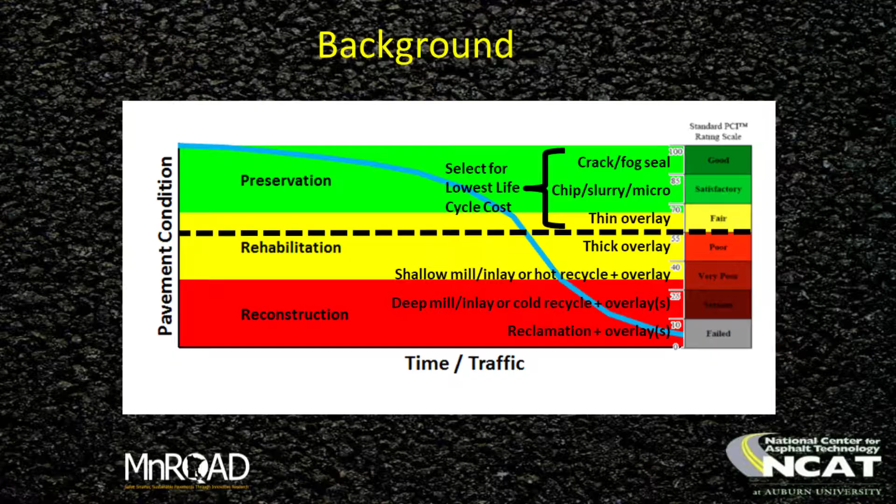I've got one background slide I really like, starting out kind of theoretically talking about the life cycle curve for pavements and what is preservation, rehabilitation, and reconstruction. And when you overlay onto this an ASTM style PCI grading scale, and then you look at how some of the states, some of the agencies, counties and cities, have historically done kind of the worst first approach to the work that's needed on a roadway based on the severity level of the roadway. Of course, in pavement preservation, what we want to do is keep things up on the high end of the scale.

I really like this graphic, and I'm going to actually update this. I was in New Mexico doing some training a couple of weeks ago with Jeff Mann and the guys from the New Mexico DOT, and they've actually put dollar values on their y-axis on a graph like this. So on their scale for life cycle pavement performance, they go from 0 at the top of the y-axis where you first build a brand new pavement, and the bottom of the y-axis is just under $1 million a lane mile.

So they've actually gone through their maintenance and construction databases, connected that to pavement management, and they're able to put dollar values on the different options, and it helps them to focus their resources on staying up in the high part of that curve, because what we really want to do is select those options that give us the best possible life cycle cost and investment.

The challenge that most state agencies have, maybe not the majority of agencies in this room, is they get feedback from their pavement management system, and pavement management tells them this treatment can last anywhere between 3 years and 10 years. How do they know what number to use when they're doing a cost analysis to try to decide what treatment to use on a particular roadway?

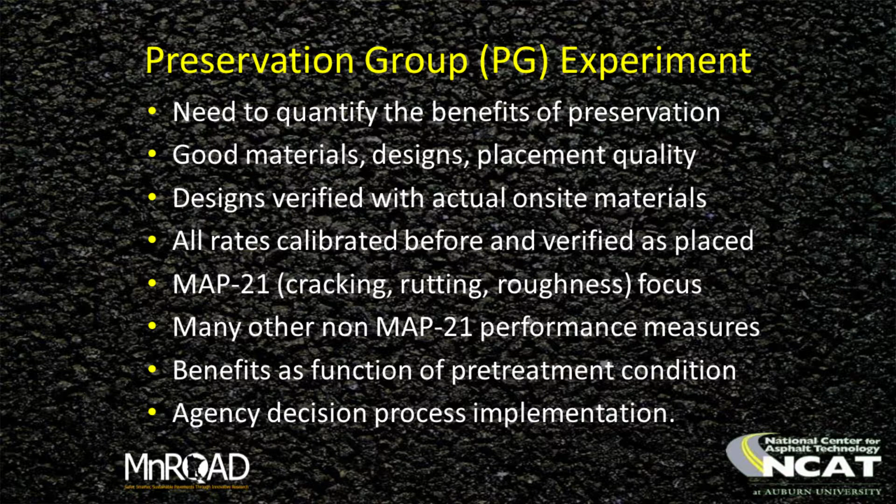So what we're doing is we're quantifying the benefits and relating them all back to different levels of pretreatment condition to attach a number to when a good road lasts a long time with a treatment on it compared to a bad road with the same treatment on it. How does that affect your expectation of life cycle performance? And then of course the end game for all this is implementation with the agency, support for deployment. And that now is our big focus in the current research cycle in the NCAT MnROAD partnership, is to support deployment of the things that we're learning.

So if you look at the preservation treatments and the treatment combinations that we've included in the study, we've got emulsion focused treatments and we got plant mix focused treatments. On the emulsion side, fog seals with and without rejuvenators, chip seals with and without rejuvenators as scrub seals, and with and without fibers. Microsurface, plain microsurface, highly polymer modified, with and without fibers, and then single and double layer microsurface treatments. And then also microsurface as a quote cape seal on chips and on scrubs.

So I put air quotes around cape seals because, as was pointed out to me, internationally the true cape seal is a slurry seal on top of a standard chip seal, and we don't have any slurry seals. All of our slurry seals are polymer modified, so they're all microsurfaces in our standalone micros and in our cape seal treatments that we have.

On the plant mix side, the focus very much is small, dense graded plant mix asphalt. So when I say small, that's a screening and sand sized mix, and all the screening and sand mixes that we do research with relate back to a very successful mix that was supposed to have been a low volume road experiment on a 2003 test track. It was designed for 500,000 ESALs, and it's now been down for over 50 million ESALs and still looks great to this day.

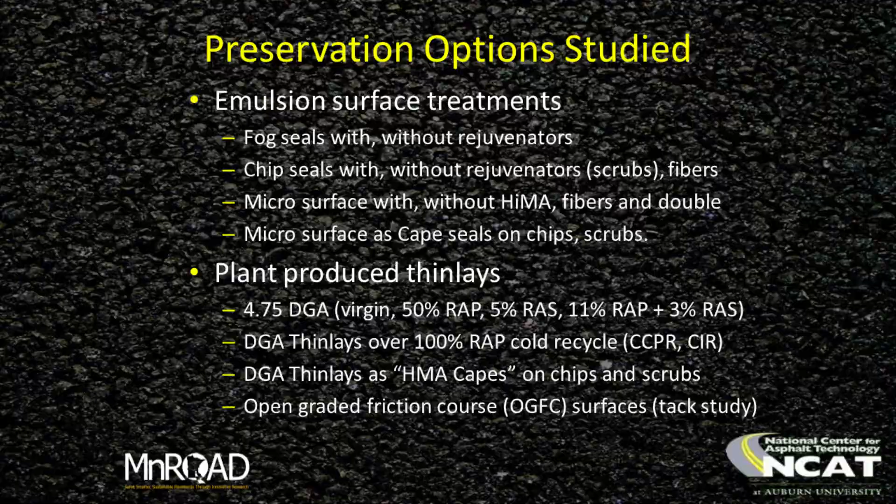We've got the same mix on 100% RAP cold recycle mix, and that's central plant and in place with both foam and emulsion. We've got the thinlay version of what Tennessee calls HMA cape seals, just thinlays on top of chips and scrubs. And then finally, we also included some OGFC surfaces with some different tack materials, because especially the southeastern states, they love the spray reduction and the safety enhancement of the OGFCs, but they've had some performance issues that we're studying different tack options to alleviate.

So these are the treatments and the treatment combinations that are included in the experiment. And again, we've got low traffic, high traffic, hot climate, and cold climate installations. So I'm going to go through those really quickly before I share some kind of hot off the press data with you. This is our original low traffic road that we did back in the summer of 2012.

It's a dead end access road to a quarry and an asphalt plant. So we got empty trucks running in and loaded trucks running out. Both the lanes are treated with the same treatments and treatment combinations. And so it gives us a really diverse surface area of good condition, fair condition, and poor condition.

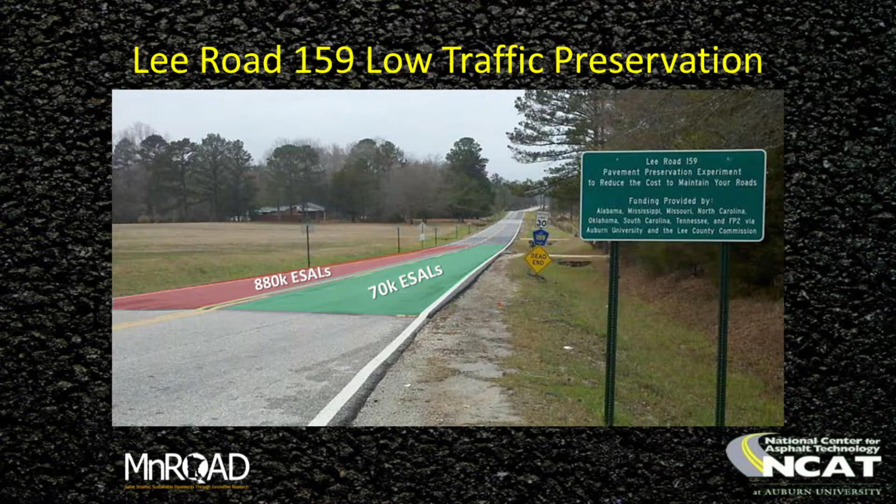So if you look at the ESALs that have been applied since we applied these treatments back, this summer will be 6 years ago, we've got 70,000 ESALs on the inbound lane. That number doesn't change much if you've heard me talk a lot about this. The outbound lane numbers, they change a lot though. 880,000 ESALs in the outbound lane over 6 years. So it's a very low traffic level on this road, but those are fully legally loaded trucks for the most part in that outbound lane.

The high traffic version in the southern half of the experiment is US 280, about 5 miles from the NCAT pavement test track. Alabama DOT gave us the westbound truck lane for about 4.5 miles, and we've done the same treatments out there that we did on Lee Road 159, the low traffic installation. Since we applied these treatments, we've got 5.6 million vehicles in that westbound truck lane, and that equates to 1.6 million ESALs, and we've got traffic monitoring hardware in the middle of that 4.5 miles that we use to keep track of those numbers. And these sections have all performed really well.

This is a very high traffic US route, and this is one of those places where Alabama DOT would have never considered many of the options that we put out there if they were just looking at what kind of maintenance activity they wanted to do to this road. They let us do this because they're one of the funding partners in this experiment.

And that's good for the southern half, more or less, of the United States, but for cold climate, where you go through the deep freeze up in the extreme northern United States, we always got feedback from states: hey, this is great. We've never seen this variety of treatments and treatment combinations in one place, but your numbers are not going to relate to us because we're in a climate that's so different from y'all. So when we engaged in this partnership with MnROAD, we did that in part to address those concerns.

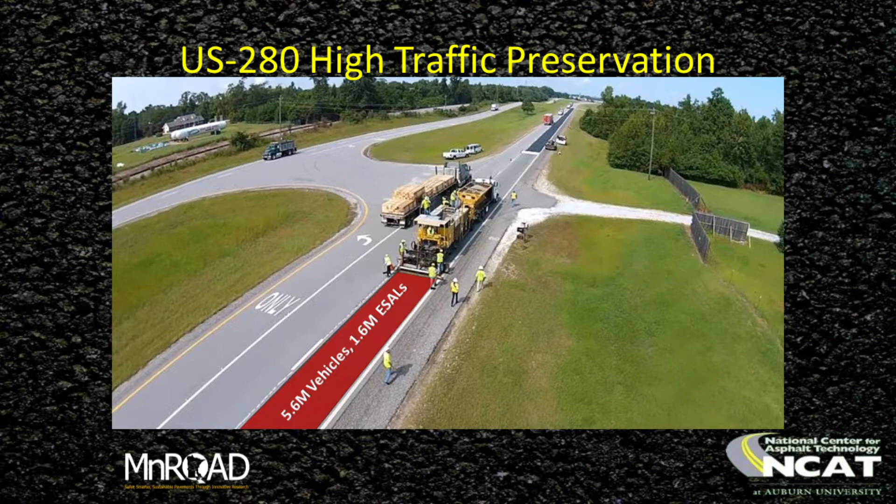If you look at the traffic levels for these roads, I brag a lot about our brothers and sisters at MnROAD. They picked these roads, and they're the perfect companions to the county road and the US route we have down south. Virtually identical traffic levels, and the big feature that they have up there that we didn't have is really aggressive thermal cracking on the low traffic roadway and the high traffic roadway.

Now the way we collect data on these test sections is we divide the wheel paths, and then we break them up into a whole series of subsections, and we map cracking, we measure roughness, we measure rutting, we measure all of our different performance parameters discretely within those subsections. So we got a lot of pavement surface area in good condition, a lot in fair condition, and a lot in poor condition. The neat thing about the experiment is we're seeing the same trends really in all of the data.

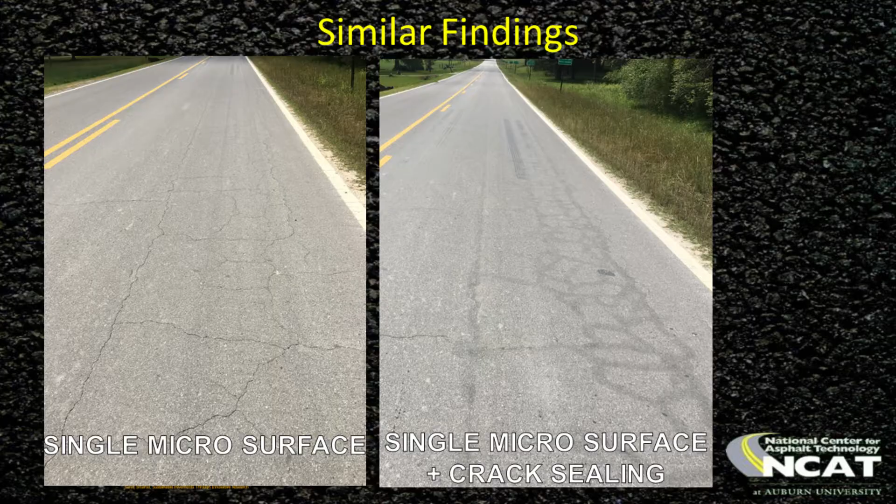So we've got a lot of good performance area in these two test sections in particular, a lot of fair and a lot of poor, and this is one of the areas where we've got some poor pretreatment condition, and it's in the more heavily trafficked outbound lane in that outside wheel path. But you can see in that picture the benefit of the crack sealing. It really prevented a lot of the cracking to reflect back up into the microsurface, and we've seen the same thing. Low traffic and high traffic down south, and then low traffic and high traffic up north.

We're monitoring roughness and we're monitoring rutting, but we're just not seeing a lot of change in roughness and rutting. You know, what we've seen on the track is a pavement pretty much has to be in the process of failing for roughness to be significantly increasing. So we see a lot of flatness in the roughness data and in the rutting data.

So what I show a lot when I do presentations is the cracking data. And what I'm going to share with you is cracking data that really is kind of hot off the presses. We try to vet the data in 6-month pieces. So I'm going to show you data through 5.5 years of performance off of Lee Road 159. And this methodology that I'm going to show you is the same methodology that we're applying to US 280 and then 169 and 8 up north.

So this is a plot that shows again, through the lens of MAP-21, where the green data, the area of the pavement where the treatment was applied, was in MAP-21 good before the treatment was applied. Yellow was in fair condition and red was in poor condition. The solid line is the cracking that we're mapping post-treatment, and the dashed line is based on the cracking that was there beforehand and based on our control sections, where would the cracking be if we hadn't done anything to the test section.

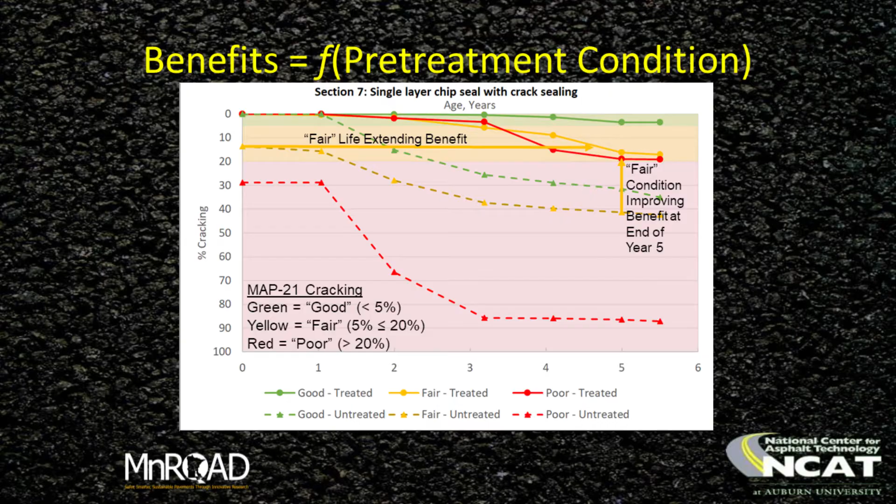So this particular data is for a single layer chip seal with crack sealing, and what it's showing you is, for example, for the pavement surface area that was in fair condition, you get about 5 years of life extending benefit out of this treatment, the shift in the x-axis, and at year 5 you get 20% improvement in the amount of cracked area.

So there's a lot of the data that we have where we haven't defined the life extending benefit yet, because you've got to cross the origin point on the y-axis. But at any point in time, you can look at the gap between the solid line and the dashed line, and you can calculate the condition improving benefit.

And this is important data, as y'all know, with the MAP-21 criteria. You've got to be able to do projections from your pavement management system based on different types of actions versus no action, assess the condition of the network so that you can maintain spending authority and maintain the percentage of your network in the right condition. So this is the methodology that we're delivering to the funding partners in the experiment for all the different treatments that we have. So that's the single layer chip seal with crack sealing.

Interesting thing is when you do a double layer microsurfacing, just an extra pull of microsurface completely changes performance. And many of y'all here have been to Lee Road 159 and have walked the road, and you've seen this for yourself. There's a significant improvement when you make multiple passes, when you make 2 passes.

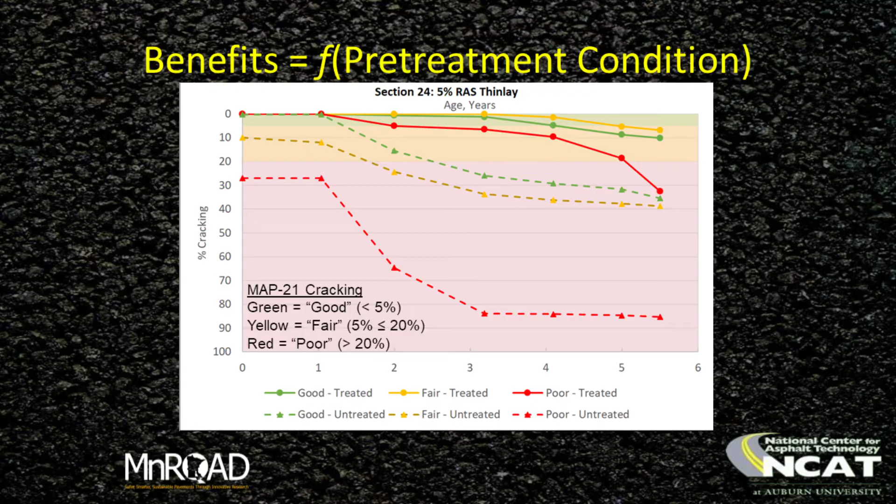So you put 5% shingles in it again. That's the virgin Thinlay with neat asphalt. Put 5% shingles in it. You hit about the 4.5-year point, and you start to significantly turn a corner when you had a lot of cracking, pretreatment poor condition, again, primarily in the outbound lane and that outside wheel path.

So to summarize all that, we have seen the value of good materials, good designs, good construction, and good inspection. We've had good performance from all the treatments and all the treatment combinations. What we're doing now is quantifying the life extending and the condition improving benefits, the X shift and the Y shift in those performance curves.

And that's the data that you need at the state agency instead of just using the average value for your treatment comparisons. You look at your pretreatment condition of your roadway from Pavement Management, and then you can pick the curves that are the most appropriate based on your pretreatment condition, and then you can do your comparison.

We've also been able to measure the reduction in subgrade moisture contents. We're still doing that, Jim. We just got a set of data back in. It was emailed to me this week that my team measured, and so we've been able to show when you've got a good treatment down and you keep the surface sealed, what happens to the moisture content in the base and the subgrade. And we've been collecting those data again for 6 years on Lee Road 159. We have seen similar trends north to south, low traffic to high traffic.

The good news is, and this, Jim and Rod, this might be news to y'all and to the states here that are part of the funding partnership, but we're now planning with our MnROAD partners to do cold recycle and FDR next summer, not this summer because it's too late to get it in the bid cycle because of the short paving season they have in Minnesota. But we do fully expect to get cold recycle and FDR in the cold climate, which we have not previously had. So we're really excited about that, and that should go down in next year's paving season up in Minnesota.

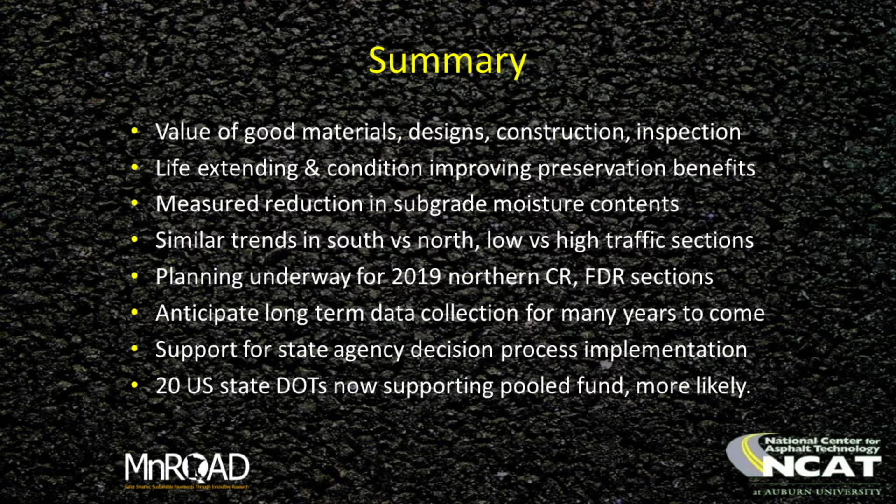We anticipate collecting data from all these test sections for a long time, and so we just did a 3-year extension on the pooled fund. So we're referring to this as a 2018 research cycle. There actually are 2 separate pooled funds. The preservation research is in a pool fund now that's being hosted by Minnesota, and then we've got the other stuff that is under the pool fund, National Transportation Pool Fund for the NCAT Pavement Test Track.

Part of the emphasis in this cycle is going to be support for deployment. So I'm really excited. My job is evolving just a little bit, and I'm excited about being able to work more. One of my favorite things about what I do is working with the states to actually bring about the innovation, implement the things that we learn on the track and off the track, and I'm going to be doing more of that in this research cycle. So hopefully I'll be working directly with some of the people that are in this room.

We've got 20 different states that are now in the group. We think it's going to be at least 21, and we've got quotes out that could bump that number up to about half of the states in the country. So that'll really be a milestone for us when we get half of the states in the continental United States.